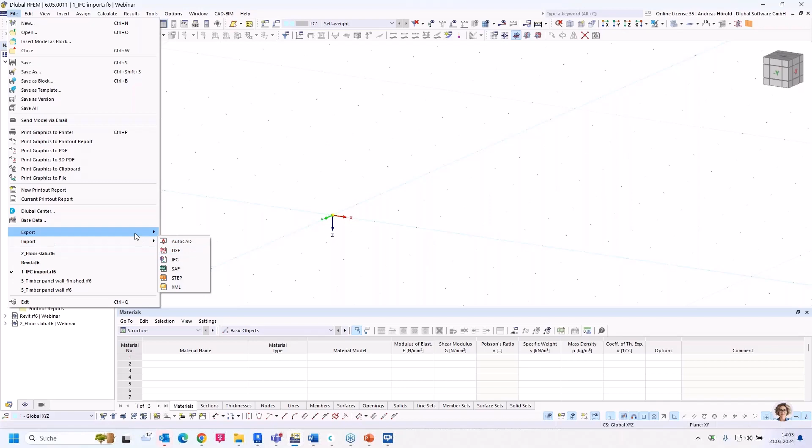And regardless of which direction you exchange data, the structural analysis view and the reference view, also the coordination view, can be processed. So let's import an IFC file. So that file. You can choose any coordinates where you would like to import it. So, and then let's press OK.

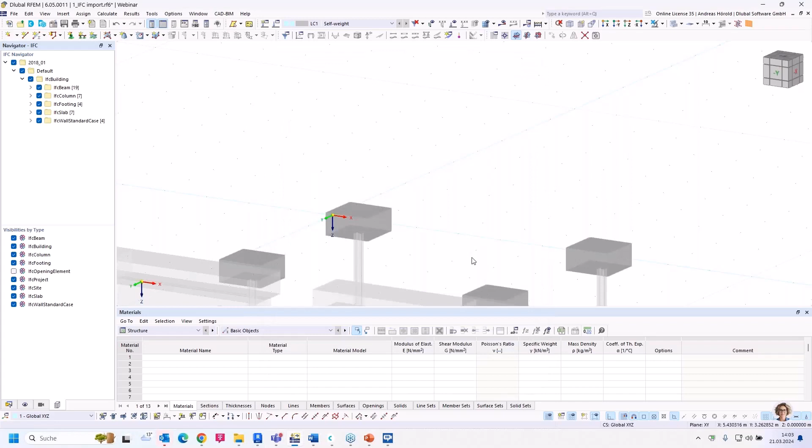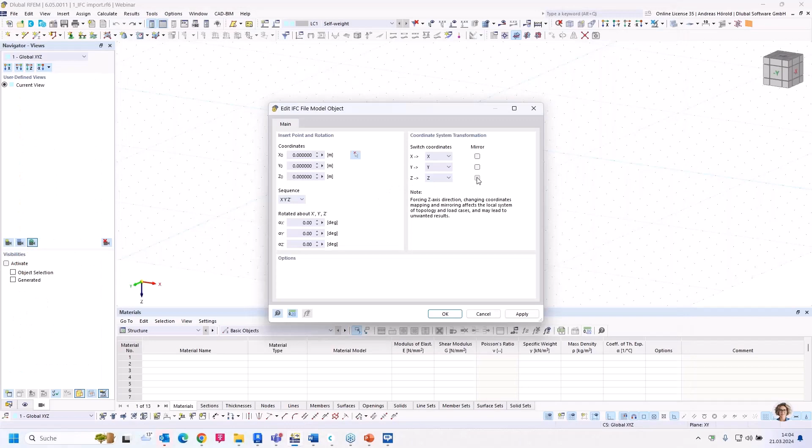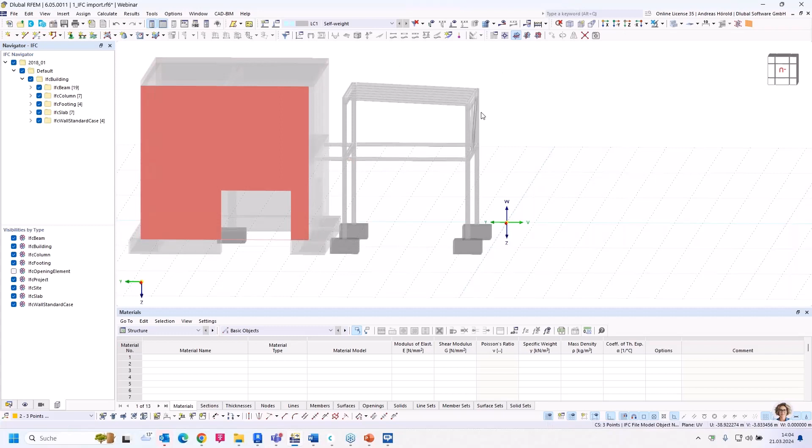And you see the import was good, but you can see the direction of the z-axis was in the opposite direction in the CAD model. That's why we do the import again. File, Import, IFC. So, and we mirror the z-axis. Okay, that looks quite better. Imagine we have to design the steel construction. We ignore the building here, the concrete structure, and let's prepare the model for the design.

You can see at the moment it's only an IFC model object. We have to check the CAD BIM conversion tables. The steel material has to be assigned with the material from the database in RFEM 6. Also the sections, you can see the different cross sections. Most of them I already assigned with the correct RFEM section from the library. The concrete items are not of interest for us in this example.

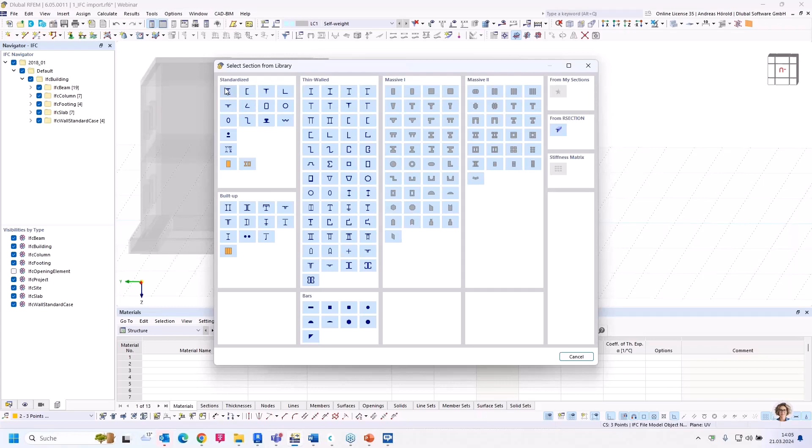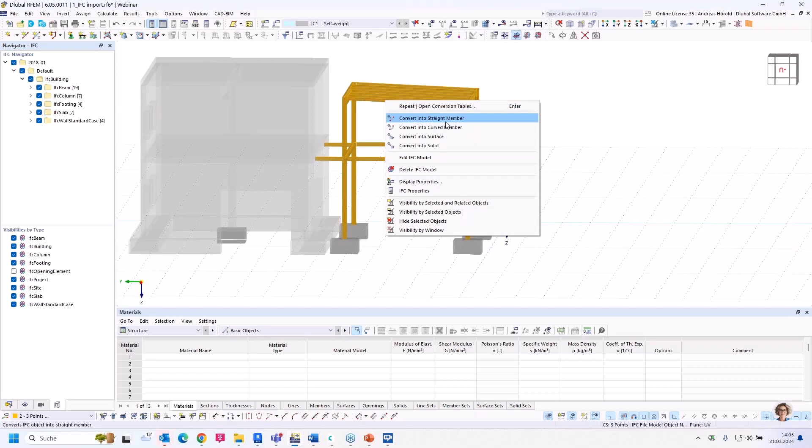Let's assign the HEA 160 from the CAD program. That's a standardized profile. So, and then HEA 160. Okay, now the list is complete. So, what we have to do now, we have to select all, and then with a right click, we convert the whole construction into straight members. Okay, let's disable the other IFC objects here in the navigator IFC on the left side. Now there's only the steel construction.

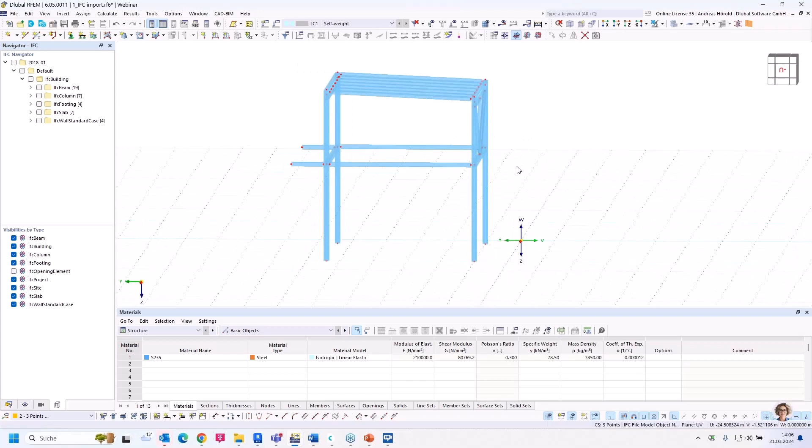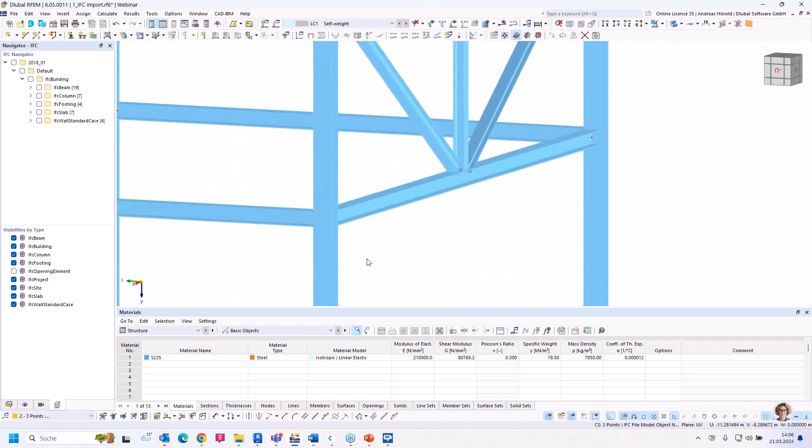Yeah, that looks quite good, but only in the transparent or solid model. But when we take a closer look in the wireframe model, you can see the members are not connected to each other. Let's turn back to the solid model. In the CAD model, the horizontal beam here is connected with the flange of the column, and so on. But we need the axis of the members, and they need to be connected. So let's turn back to the wireframe model.

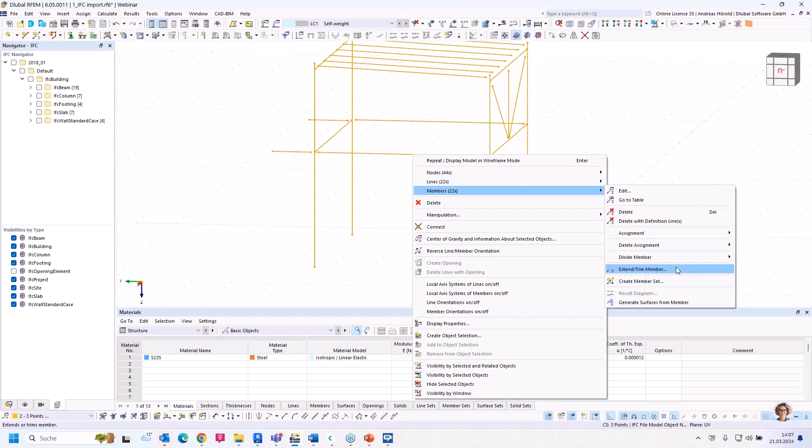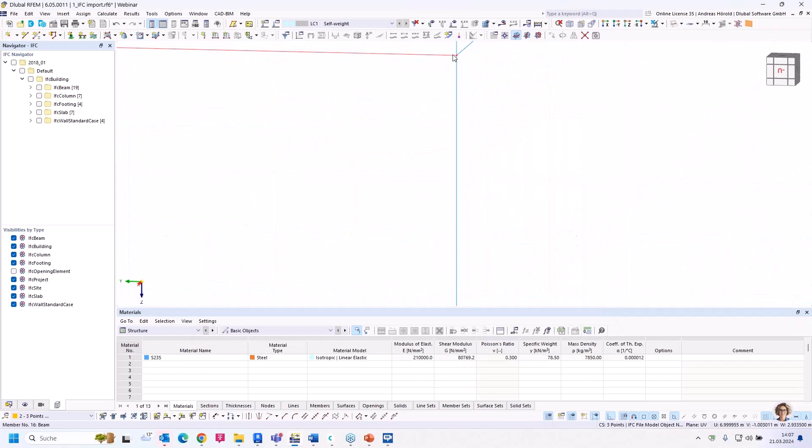There's a function in RFEM 6 with which you can correct such things. I select all, and with a right click, I can modify the members with the feature Extend/Trim Member. Okay, let's do that. We would like to extend them to the next member or line on both sides. Okay, that looks already quite good, at least at this node and the other nodes.

But you can see the purlins are not yet connected because we have an offset, but we will correct it. But in that case, also for the bracings here, we have to do that manually. For example, with drag and drop. So here the same.

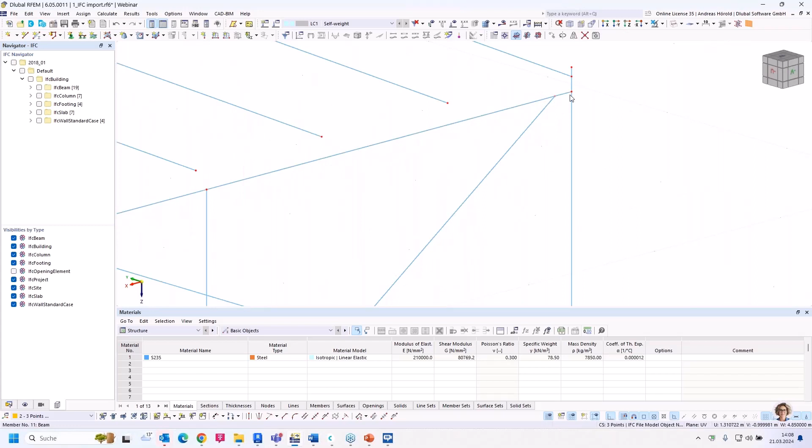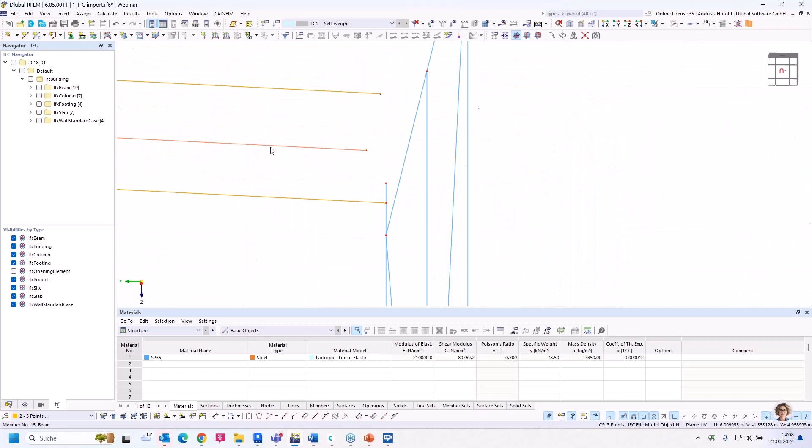Also on this side. Okay. So, and now we come to the purlins. I use this function that we connect the members or divide them with a node so that I can, for example, delete such a member. But in the first step, we move the roof members to this node with the move copy function.

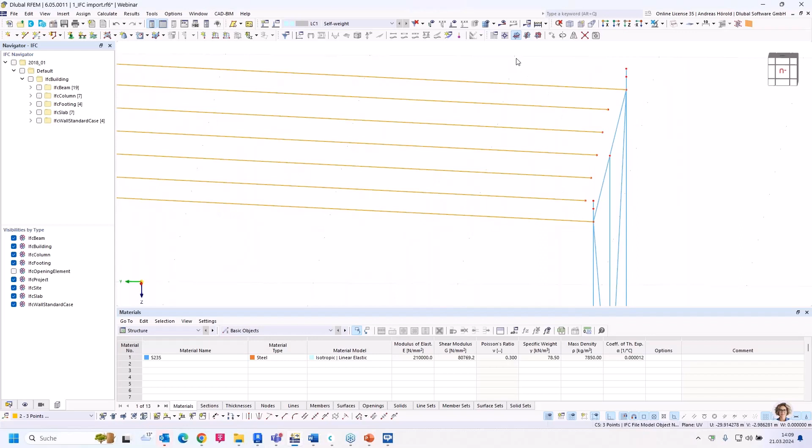So with a vector from this node to this node. Okay. So let's turn to the -y view. So I delete these parts of the columns. Okay. Also this one. Okay.

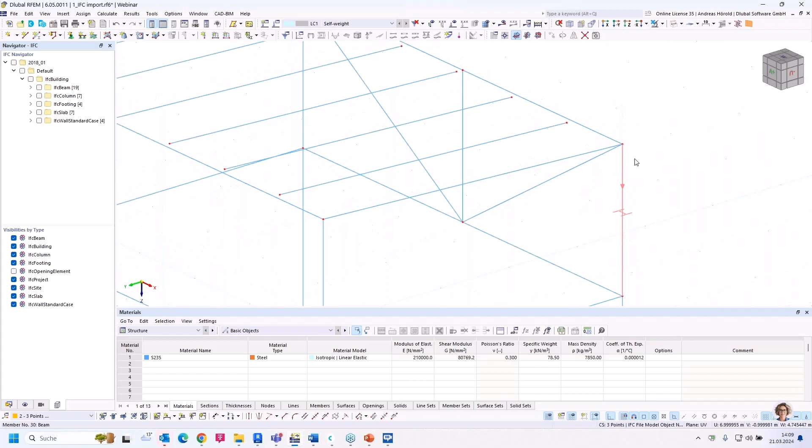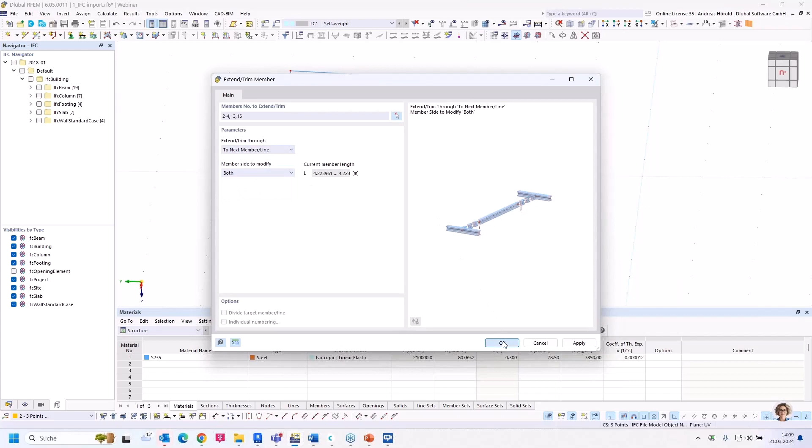So, and now I need to extend the purlins. I select them. Then with a right click, I turn to the already showed feature, extend trim member to next member line on both sides. Okay, that looks already quite good.

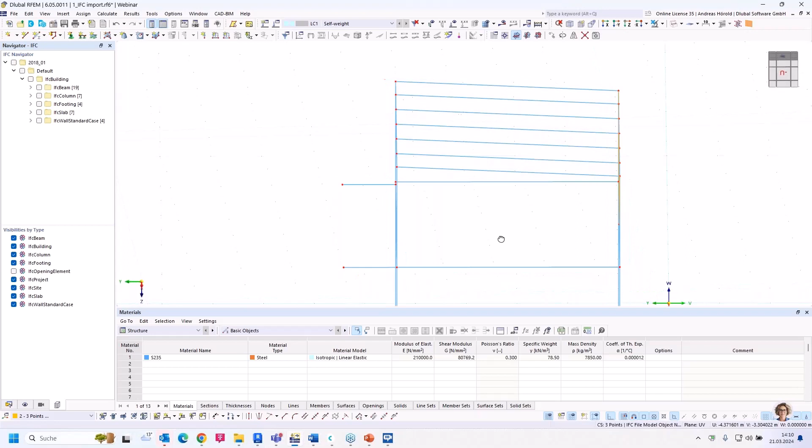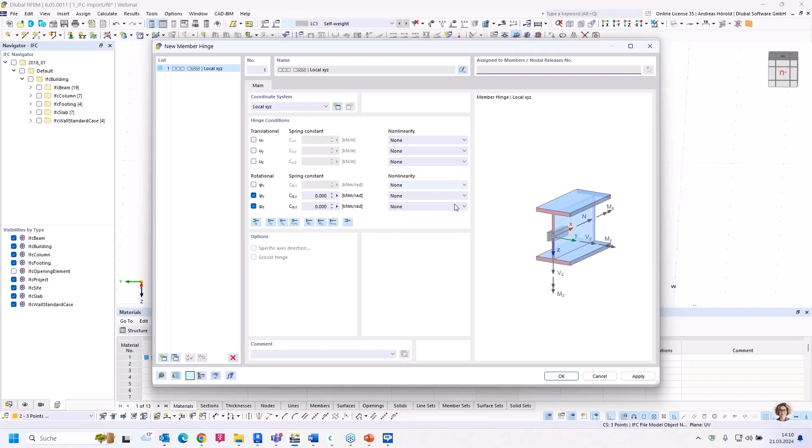In the first step, I would like to change the bracings here, with a double click, for example, from beam to truss. So, and I change the purlins or I add hinges. So double click, hinges, go to the table hinges and create new hinges around the Y and Z axis of the member. Typical moment hinge on both sides. Okay.

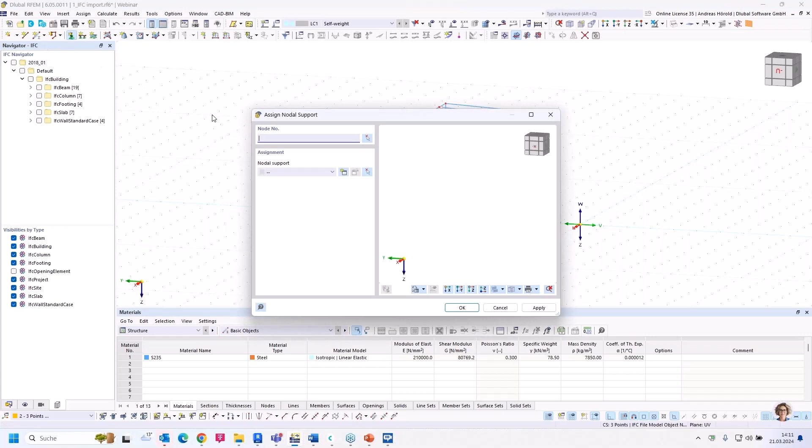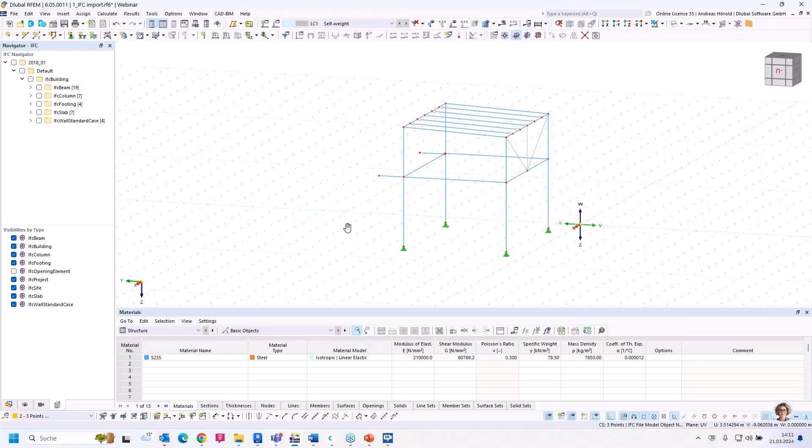Yeah. Then we need to add supports. So I add supports here left above. So nodal support in all directions and around the Z axis. Okay. And the columns are supported now. And we create also supports on the concrete wall here. So new nodal support in all directions and around the y-axis. Okay.

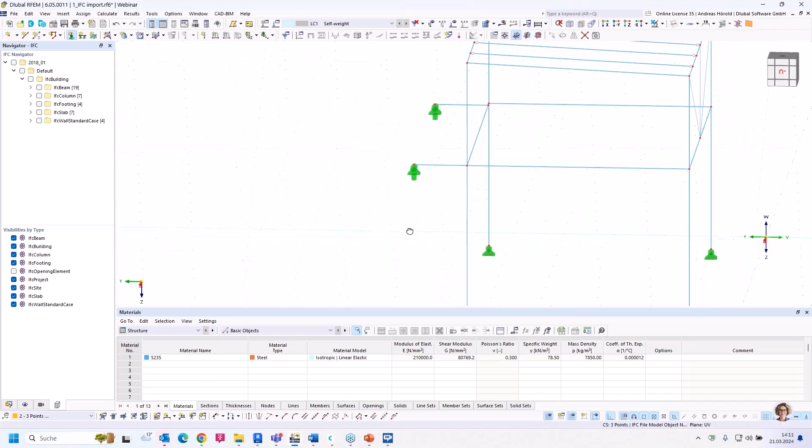Yeah, that should be all. The model is now corrected or modified. We can go to the tools and do a plausibility check. All is okay. And let's calculate the self-weight load case. Okay, we get results. That means all is connected correctly. And we can assign other loads, snow and so on, and wind, and calculate the structure.

Now you can see, it's quite complex to modify such an imported model. It depends how good the model is created in the CAD program. Now, there are other possibilities, for example, with the direct interfaces from RFEM to Tekla Structures, or to Revit, or from Revit to RFEM. Let's show that. I turn to Revit, and if you create a physical model and in parallel an analytical model, you can also create supports and so on. And if you export such a model, you don't need to modify so much as I showed for the IFC model.

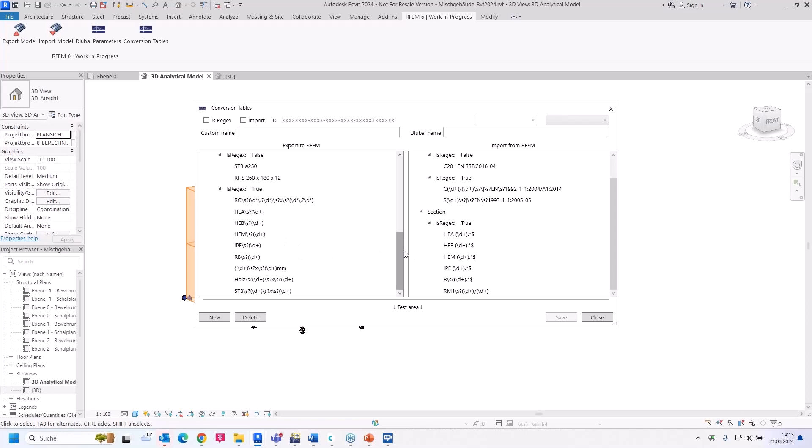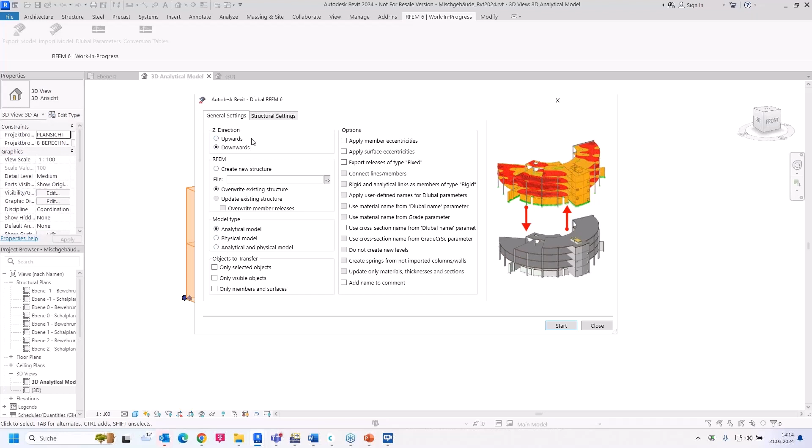Let's do that. We turn to RFEM, the RFEM dialog here. There are conversion tables. You can also add different cross sections that need to be transferred, and then you can go to the export. You can select if the Z direction is upwards or downwards. You can overwrite the existing structure and so on. You can transfer the analytical model, physical model. You can do structural settings. You can transfer nodal and line supports and so on.

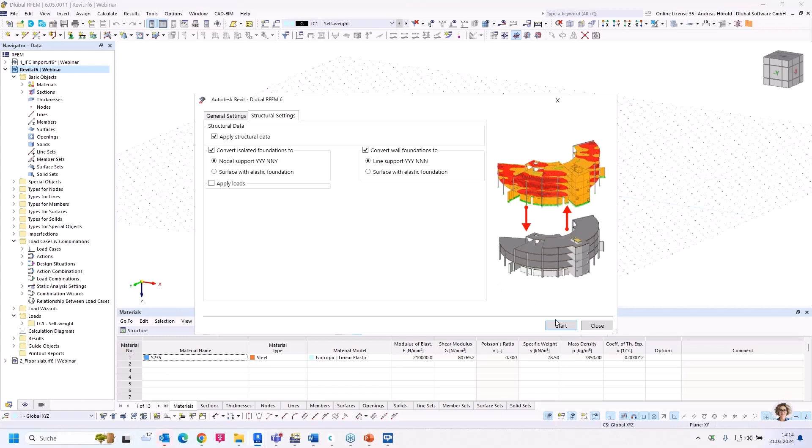I need to go back to RFEM and go to an empty model. It's an empty model. So, and now I start the transfer. Start, okay. Now that takes only some seconds. We go back to RFEM. And now you can see the transferred model. That looks quite better. We can turn to the wireframe model. All members are connected and so on.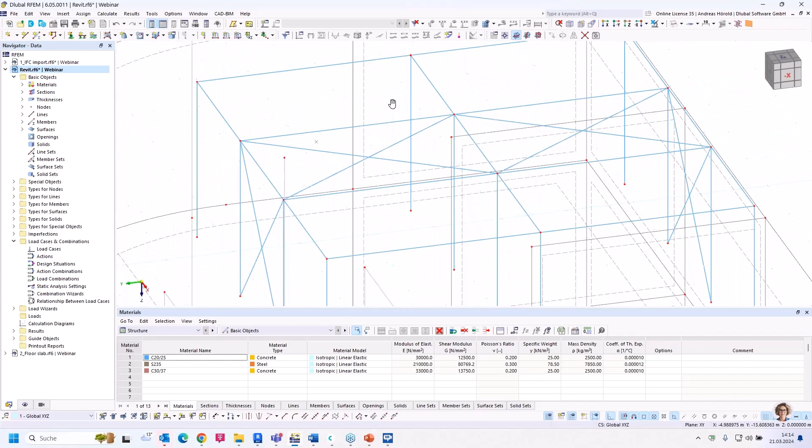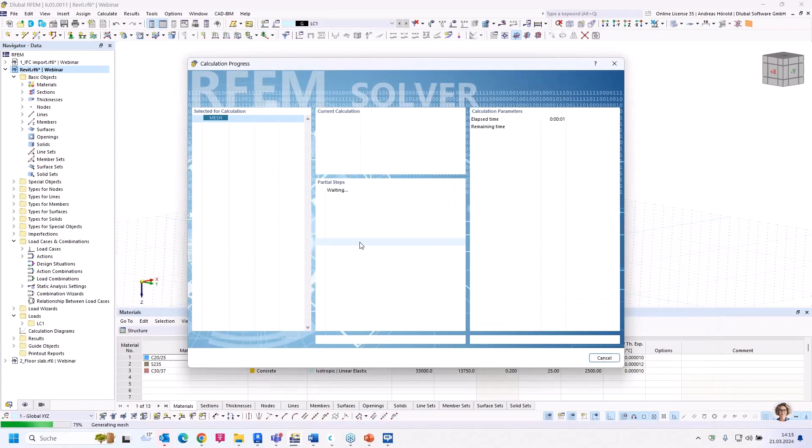So let's calculate the model. I create the static analysis setting and calculate the load case, self-weight in that case. So the same workflow is in Tekla. The input is analogous. And as I already said, the better the model is prepared in the CAD program, the less additional work in RFEM is necessary.

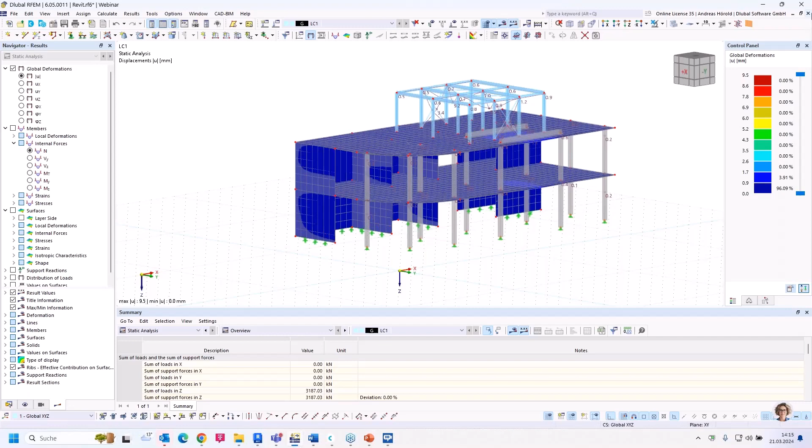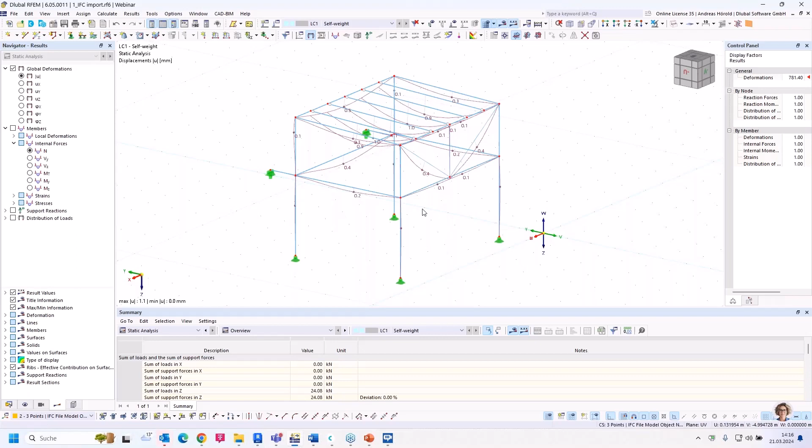Okay, so I close that model. And I save this model. And we turn to the next question. The next question is, can I transfer a support load to any location in the target model without defining a node there? Yeah, that is possible. I would like to show you how to do that.

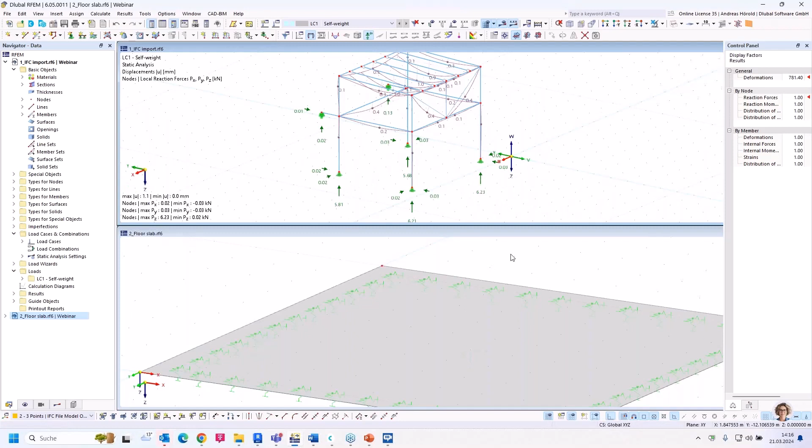I open also the floor slab, or I show both windows. Okay. We would like to transfer the support reactions to this floor slab. Let me switch off the user-defined coordinate system from the CAD model. You can see the steel structure is in the positive Y direction and the floor slab is in the negative Y direction. And for the feature that I would like to show you, that doesn't matter.

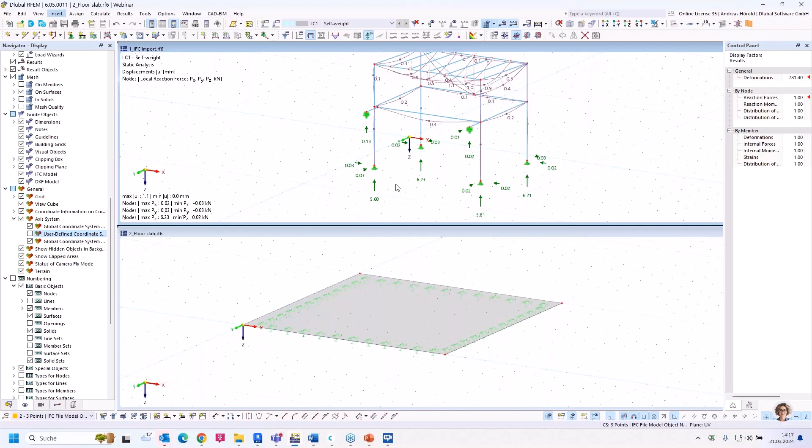Let me rotate it a little bit. We would like to transfer those 4 support reactions on any place of the floor slab. How to do that? We turn left above to insert, or at first we would like to show the numbering of the nodes. Okay, that's quite important. And I add also dimensions in the structure. Okay.

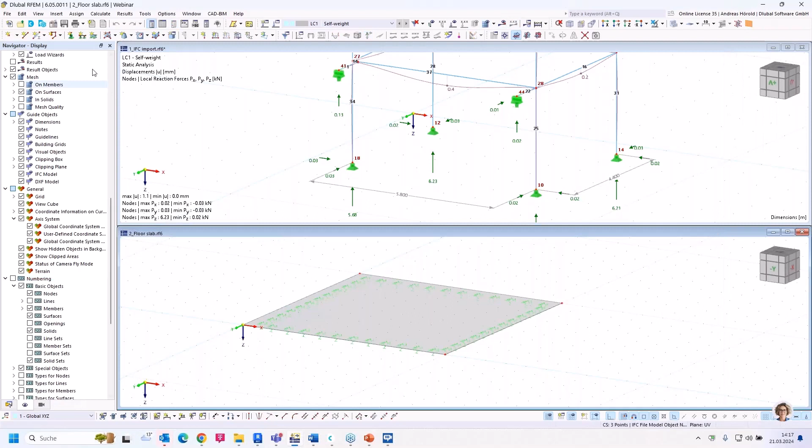So 5.8 meters in X direction and in Y direction 4.4 meters. So then we turn to the floor slab, then insert loads, concentrated loads. The feature that I show you will be released in a short time for line loads as well. I showed it for the concentrated loads.

I have to select import support reaction, and with this button I define the location of the loads. So let me select the point. For example, this point. Okay, and I have to define the node number or select the node number. That's the model name, IFC import. It must be in the same folder as the target model.

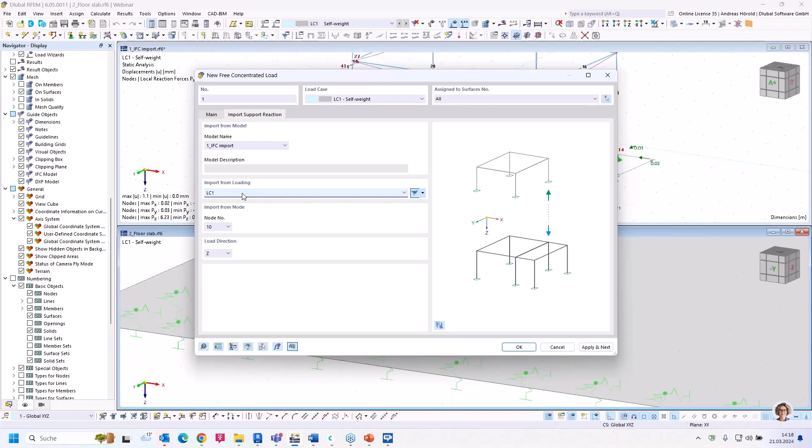So then here you can select the load case here and the node here. That's node 18. Okay. In Z direction. Okay. That's all for one support reaction. We need to copy that load, 5.8 meters in X direction. Copy. Okay. And then both loads in Y direction, 0 and minus 4.4. Okay.

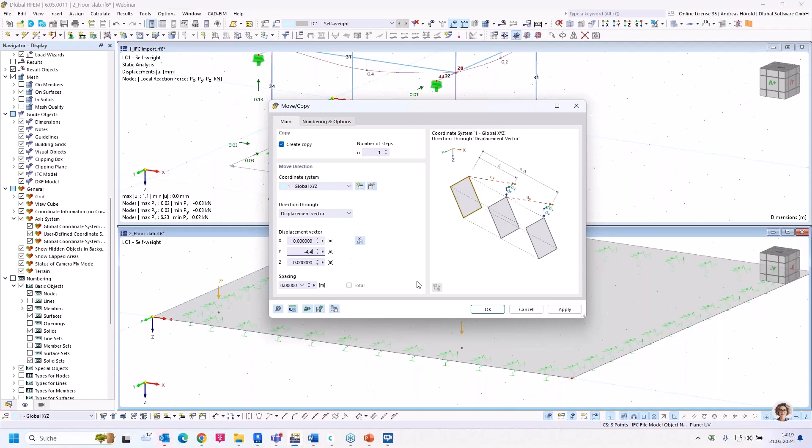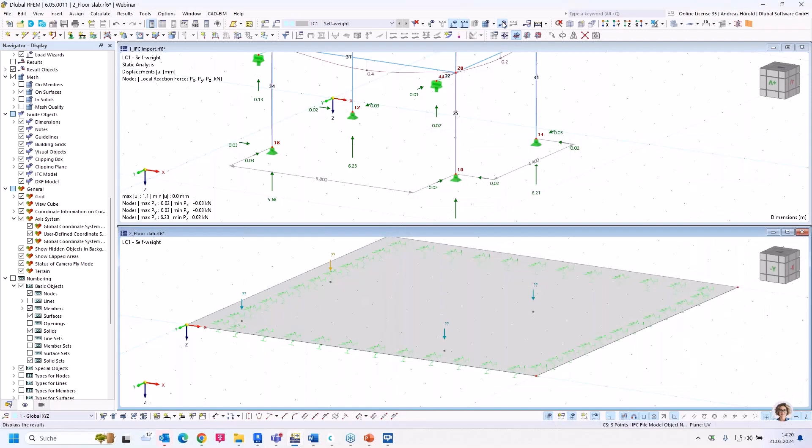So now we have to assign the nodes, node number 10. Okay, node number 10. This one, node number 14. Okay, and for this one, node number 12. So then we need to calculate the load case, and the loads were transferred from the original model to the target model. Takes some seconds.

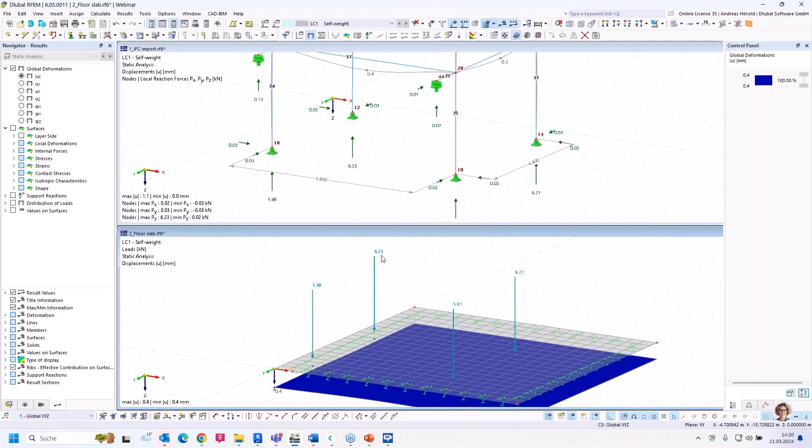Okay, so now let's compare the values. 5.68, 5.68, 6.23, and so on. It matches for all the 4 loads. Okay, that's also a little bit complex, but you are absolutely free on the locations in the target model.

And the other feature that I already showed in a previous webinar is insert load wizard, import support reactions load wizard. With this dialog, you can transfer all supported nodes to the target model. At the moment, you have to select the single nodes in the target model, but we will implement a feature that you don't need to select any single node. The program should detect where the different supported nodes are, and the loads from those nodes are transferred into the target model. That's our future plan to improve that feature.

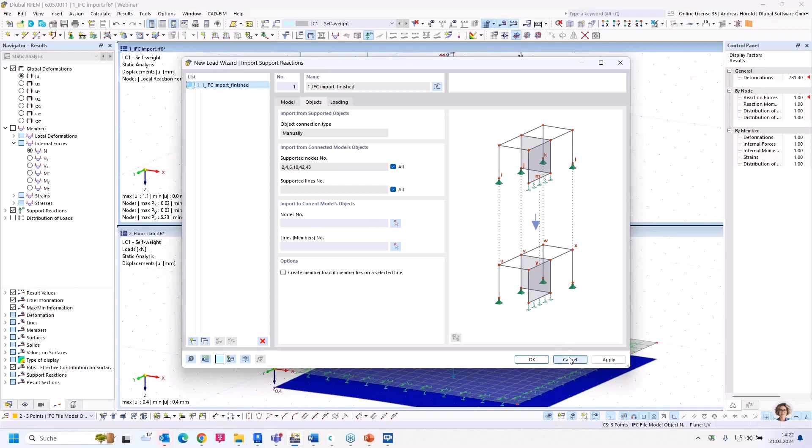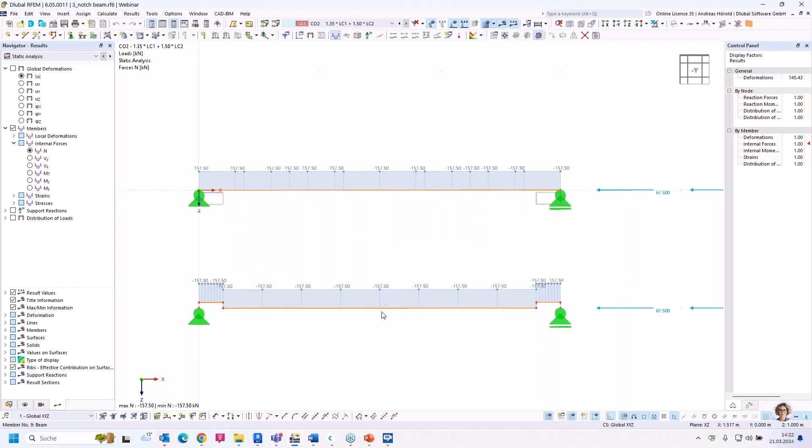Okay, then we turn to the next question. I open the next model. The next question is, are offset moments that occur when notching cross-sections considered in the design? The answer is yes. I would like to show you that on an example. You can see 2 single-span beams. I turn to the solid model, and you can see notches here at the start and the end point.

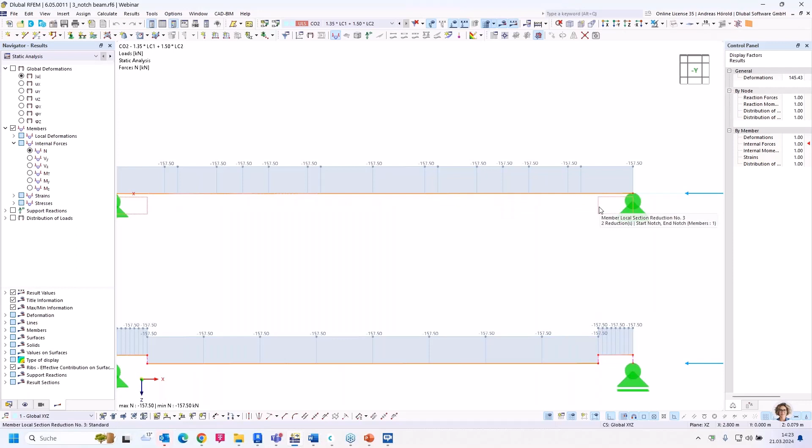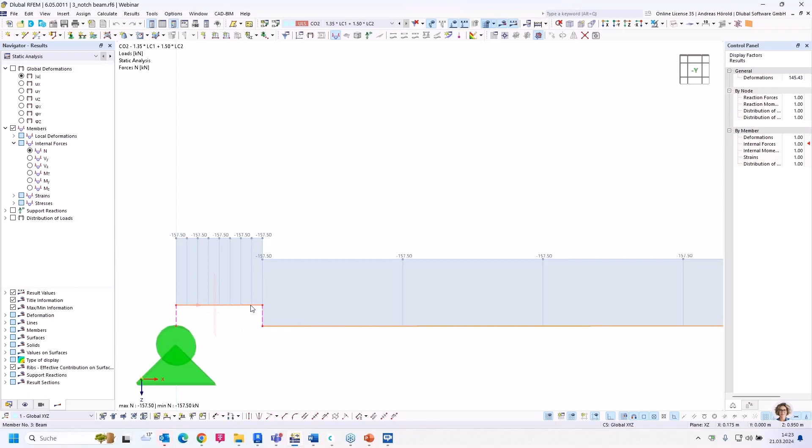For the upper model, I defined that with a design property, and for this one, I created different cross sections. Cross section with a height of 140 millimeters, and on this place 240 millimeters. That's the notch, and the axis of the member is higher than this one without notch. You can see the internal forces are the same in both models, at least the normal forces.

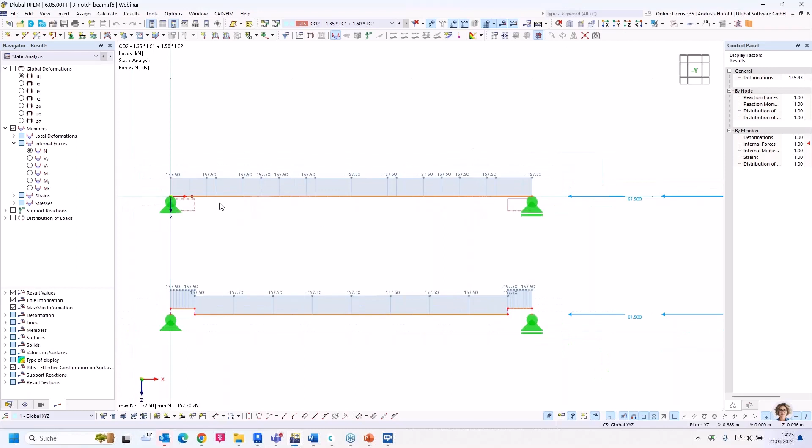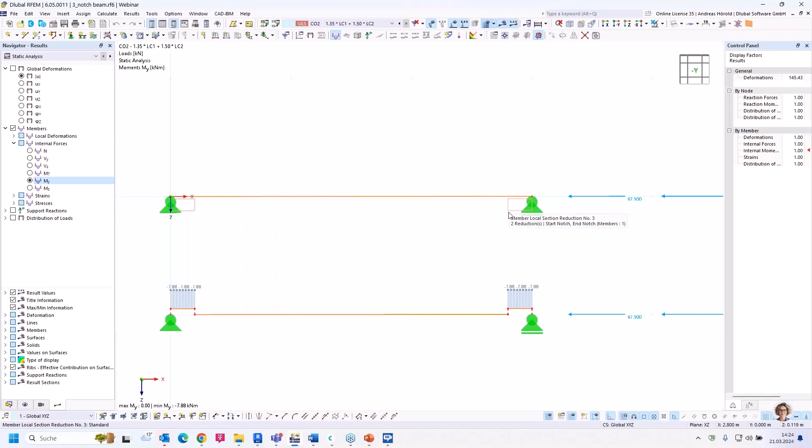But for the My internal forces, you can see there's an offset moment in this model, but not in the upper model. But I created design properties for this member, and later this offset moment will be considered in the design. So I show you the properties of the member with a double click.

Go to the design types, and you can see where our local section reductions are created. At the start, we have such a notch with a length of 20 centimeters and a depth of 100 millimeters. And the same at the end of the member. Okay. And I simulated the same notch with this model. Those are rigid members.

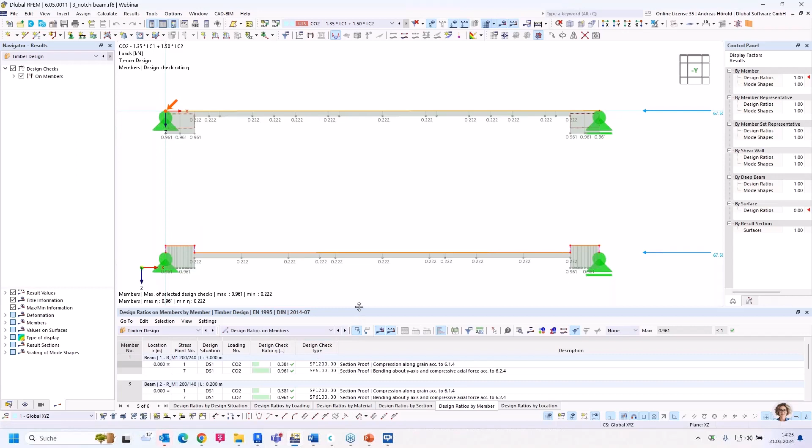Okay, and let's go to the design, to the timber design. So I go to the design ratio by member. You can see all the design ratios are the same in both models.

0.22, 0.22, and at the end and at the start 0.96. Okay, and that's the member number 1. That's the member 1 in the table.

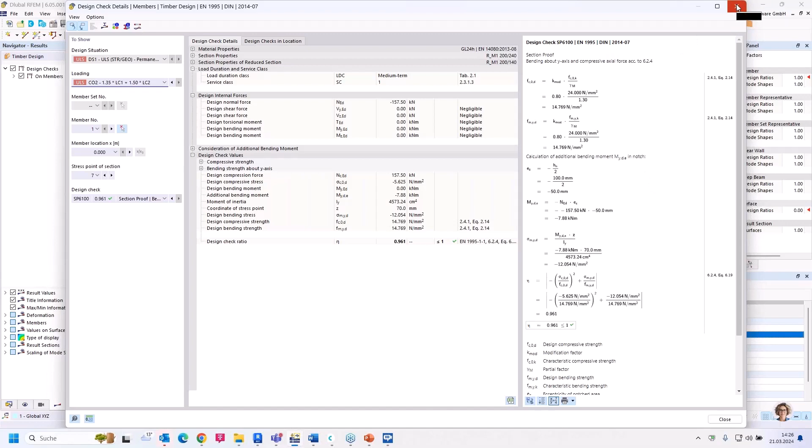I double click on that line, and you can see in the design checks, the calculation of additional bending moment is considered. The normal force with the eccentricity because of the notch, and you can see that it is considered. That's the answer to the question. Yes, the offset moments were considered in the design.

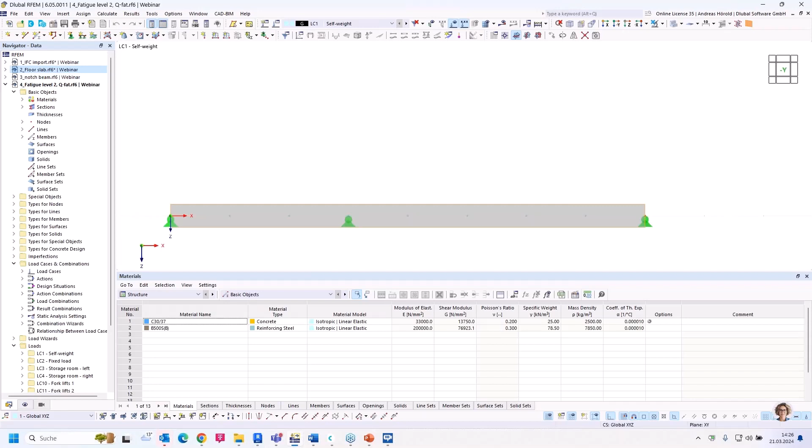Okay, then we turn to the next model and the next question. The next question is, how do I consider the Qfat value for level 2 fatigue design for concrete components? That's a simple model, a 2-field beam of concrete, different load cases, the self-weight load case, fixed load, storage room left and right, and forklift loads in different places. We simulated such a moved load.

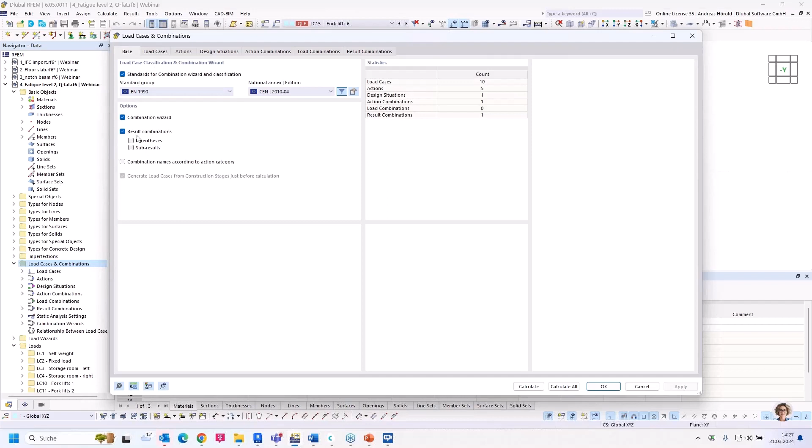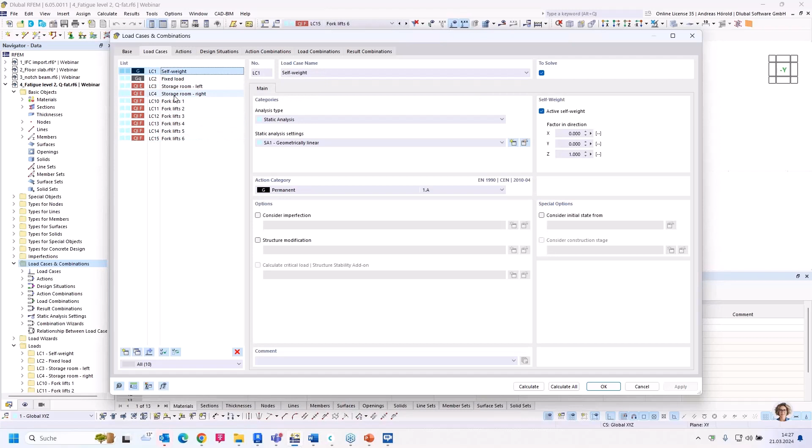So let's turn to the load cases and combinations. We created result combinations, then the load cases, and for the forklifts, I selected in the additional settings "consider as fatigue load" for all forklift loads and not for the others. The fatigue effect is generated in the actions as soon as a load case has been given the option. You can see the fatigue action.

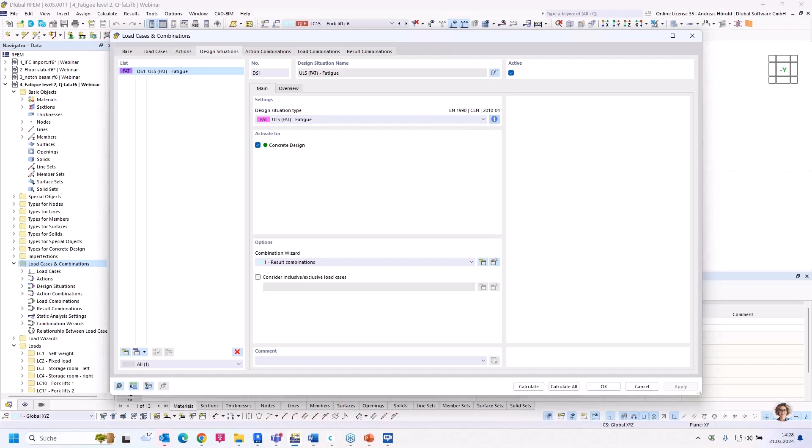So then let's turn to the design situations. We have got one design situation, ultimate limit state, FAT, fatigue. Okay, and the result combination is selected. At the moment, it only works via result combinations. You can see the forklift load case 10 to load case 15. And if we click on the info button, you can see the fatigue loads are considered 1 time. Okay, that's all for this question.

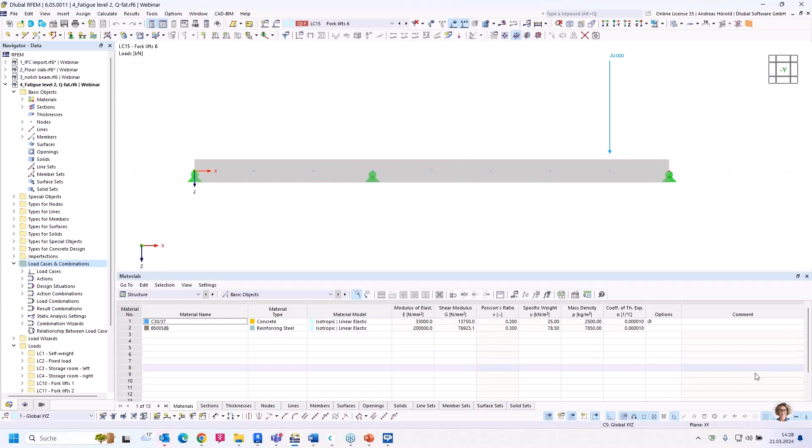The next question is, what is the purpose of the artificial intelligence assistant MIA in the program interfaces of RFEM and RSTAB? You can see on the right side at the bottom, the MIA. If I click on it, I can enter a question here. The reason is 24/7 help with the program for you, so that you can ask MIA anytime, in the evening, in the early morning, or at the weekend, and so on. That you get help anytime.

You can move the MIA in any direction or to another screen. You can also switch off the enter dialog here with that button. Let's enter a typical question here: What can I do if RFEM reports an instability in the structure during the calculation?

And when you enter such a question, it will be connected to the website, and MIA searches on the Dlubal website, in the FAQs, the product features, or the knowledge base library for an answer, and gives you the answer, for example, for this question. And you can do that, as I already mentioned, anytime. Okay, that should be all for this question.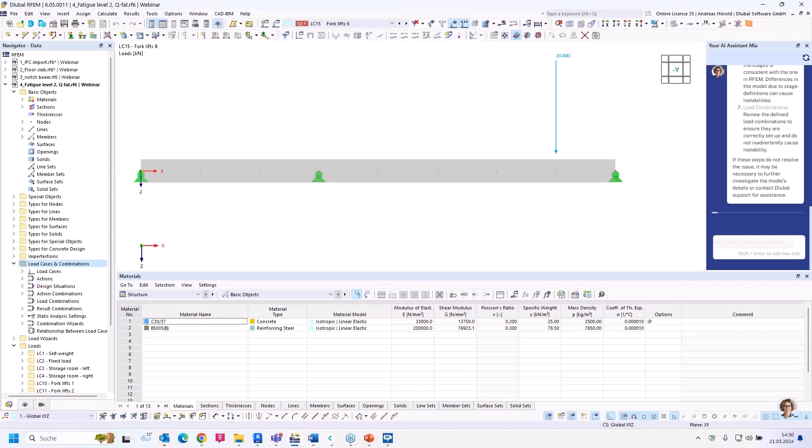I turn to the last question for today. And the question is, can timber panel walls be created in RFEM? That's an often asked question. Let me switch off the MIA. Yeah, that's a quite new feature, and the answer is now yes, we can create timber panel walls. I would like to show you how to do that.

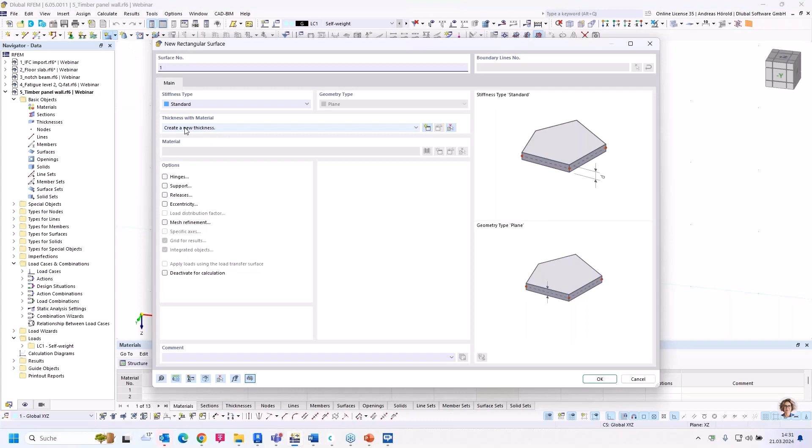I create a new rectangular surface and I have to create a new thickness. The new thickness type is beam panel. And with that beam panel, you can create a timber panel wall, for example. You can see that in the preview. Let's fill out the different dialogs.

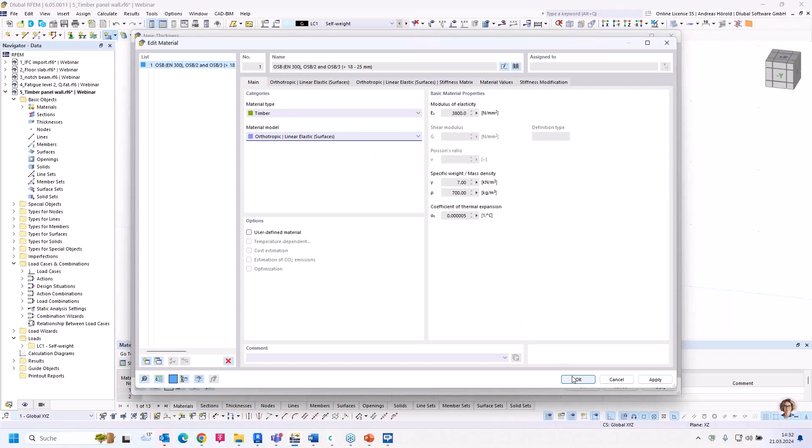We have to select the material. I turn to the library, timber, then an OSB sheet with a thickness of 18 to 25 millimeters. My sheet should have a thickness of 19 millimeters. Okay, but we have to select another material model, an orthotropic linear elastic material model. Okay, let's enter the thickness, 19 millimeters.

For the sheeting on the back side, the same sheet, an OSB sheet with a thickness of 19 millimeters. Then the framing members, the horizontal members and the vertical members at the outside here. Section, we have to define a section, a massive section, with of course another material, not OSB, but solid timber. I choose Eurocode and then softwood C24.

Okay, and I have to enter the parameters, 60 millimeters and a height of 180 millimeters.

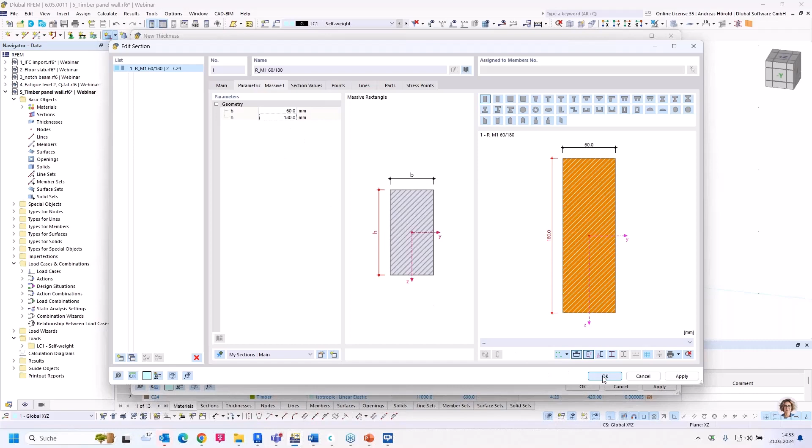Then you have to select the connection type: nail, staple, or user-defined. In my example, I choose nail. Then I enter the connector dimension, 6 millimeters, and a spacing of 100 millimeters. The connector stiffness is calculated automatically.

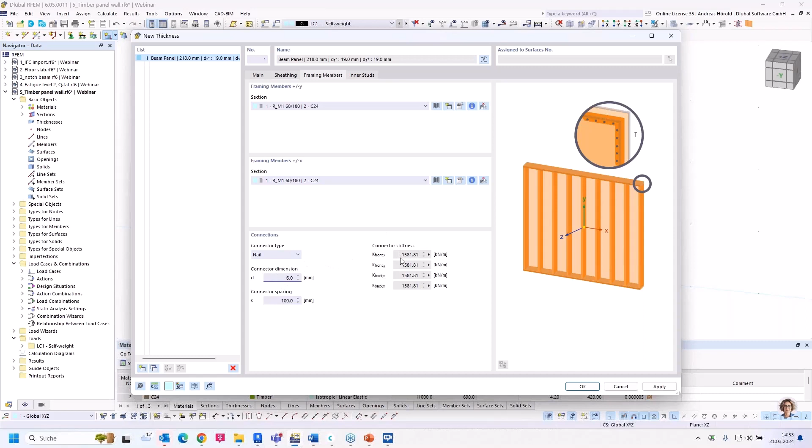Let's turn to the last dialog here, the inner studs. For this one, I choose the same section, 60 by 180 millimeters. The distribution should be entered as center to center, gap, uniform, or user defined. I think center to center is the most common entry.

I have to select the spacing. A typical spacing of the OSB sheets is 62.5 centimeters. Then also I have to choose the connector type, also nail in that case, 6 millimeters and a spacing of 100 millimeters. Okay, that's all.

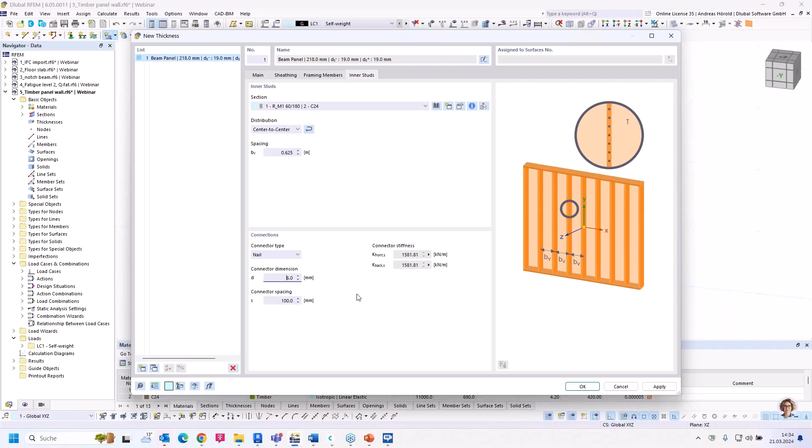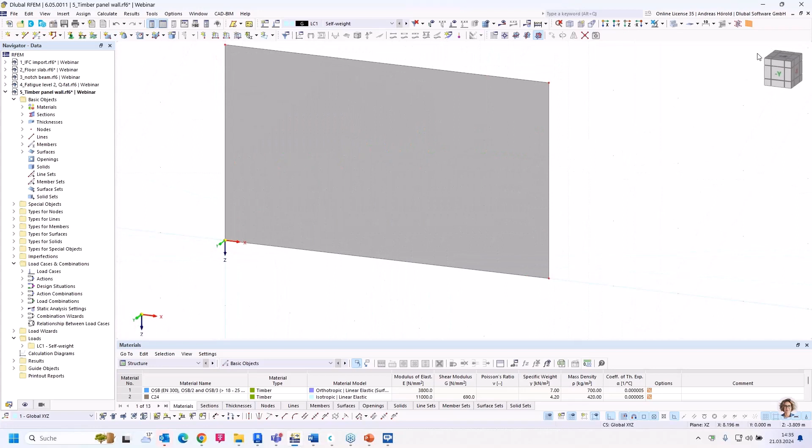I have to select the dimensions, for example 5 meters width and a height of 3 meters. And you can see the wall. With that button right above, you can display the beam panel, and now you can see the submodel. You can see the sheets on the outside.

Then the beams with hinges, but it's quite stiff in the direction of the wall. Let's check that.

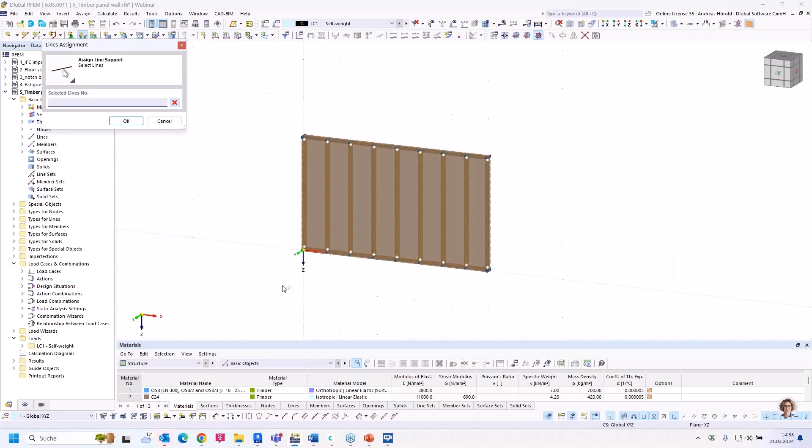I enter, left above here, line supports. I select the line. Then line support, create a new line support in all directions.

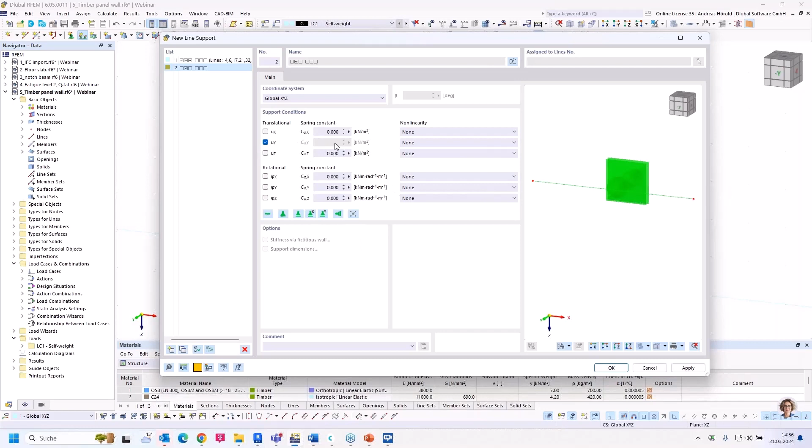And for the upper lines, I select another line support, new line support, only in Y direction, so that the wall doesn't fall down to one side, for example.

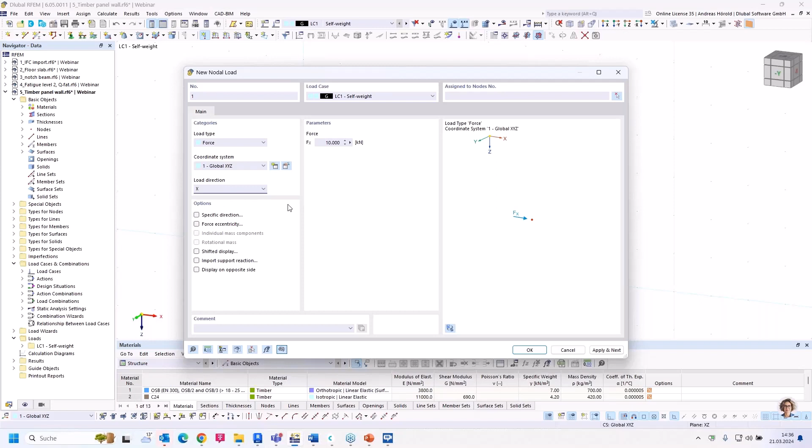And I select these lines. So then I enter a load, a new nodal load, for example 10 kilonewton in X direction, in that node.

Okay, and let's calculate. Let's check the deformations: 0.4 millimeters. I can see that it's a quite stiff construction.

Okay, that should be all for today's questions, or the questions that our customers asked the last time.